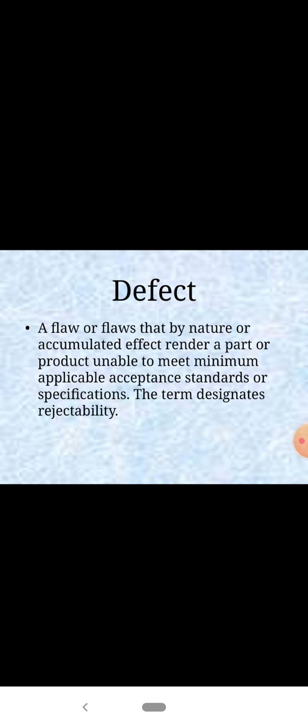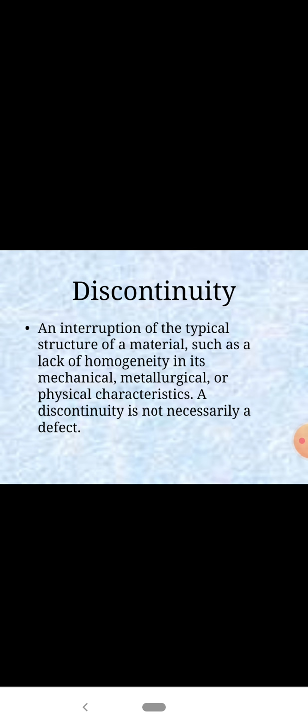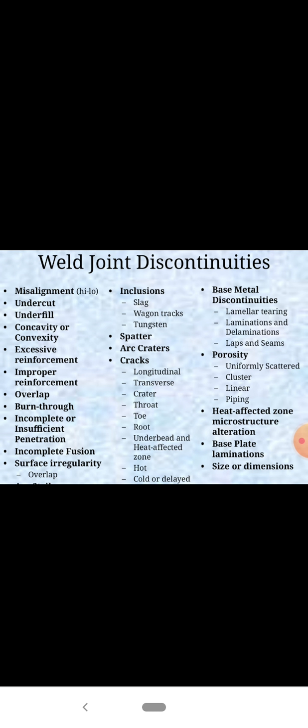If we talk about the kinds of welding operations, that leads to various kinds of defects, the first one is misalignment. As you can see in the figure, these misalignments occur.

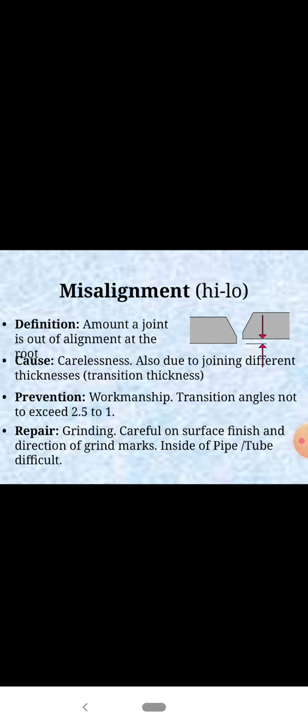As you can see, there is a figure showing the difference between the misalignments. This is just improper positioning of the base material before the joining, and that will cause this kind of defect as well.

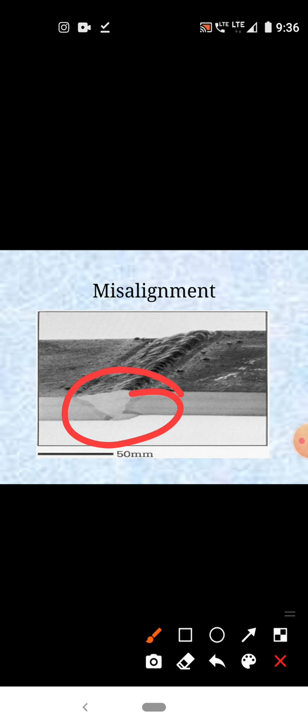As you can see, this is the improper position in the figure shown here in the bottom area, that is improper positioning of the weld piece base material, leading to this kind of misalignment. And this is the practical figure showing over here.

As you can see, the bead is shifted from its position. It is not in that condition to see these problems. So this problem can be overcome if proper attention is given.

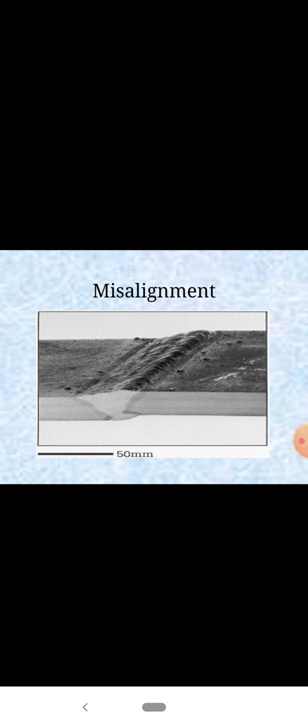And now we are talking about the next kind of crack, that is called surface cracks. These surface cracks are very important to understand, like this undercut. Let me explain this first, where undercut comes from and happens.

There is a kind of crater, or grooves that melted in the parent metal adjacent to the toe of the weld and left unfilled by the weld piece. So this kind of problem arises in this particular undercut.

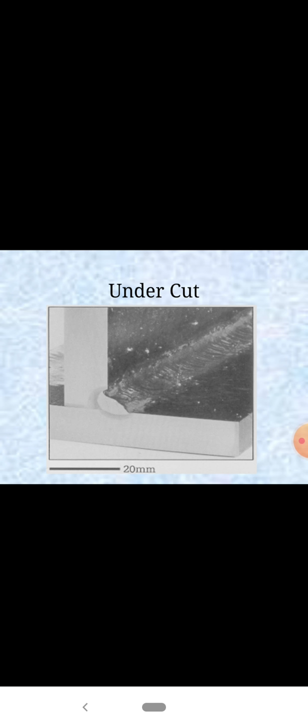So these are generally located parallel to the junction of the weld material, and caused due to high amperage, electrode angle, long arc length, and rust, which is also causing this kind of problem.

And undercut is also caused by excessive welding current and voltage, causing the width of penetration, which leads to excessive melting of the fusion faces. So due to melting of the excess surface of the material, that leads to this kind of problem.